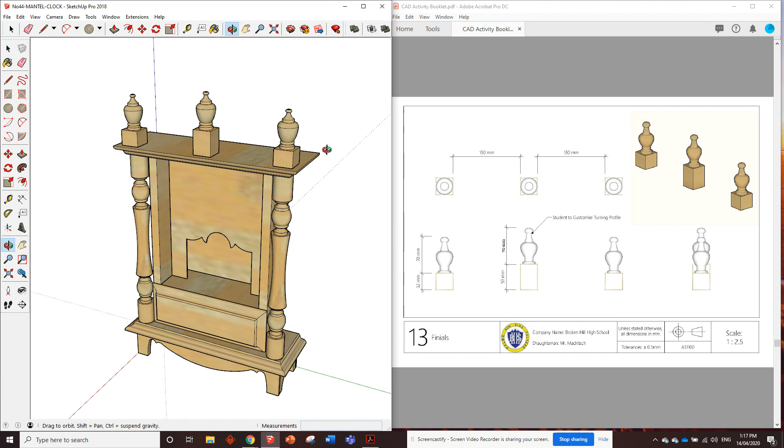We haven't got them in the perfectly correct position yet. We've got them perfectly centered on the top, but we haven't figured out how far forward they are from the back - what this gap here has to be. To do that, if we look at the first drawing, we can see that the crown profile side bits line up perfectly with the back and butt right up against the finial.

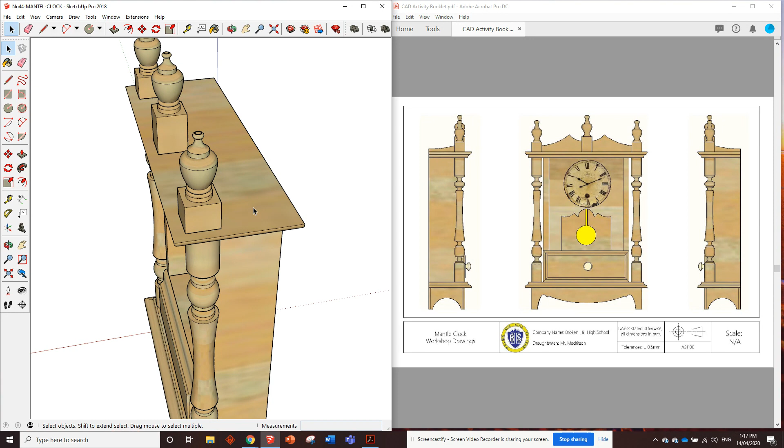So if we figure out what that length is, we know exactly what position it needs to be in. Let's go to the crown profile sides drawing, and we can see that is 85 millimeters long. So that means the gap from the back of the base to the back of the finial needs to be 85 millimeters. Let's go from the back and measure 85 millimeters.

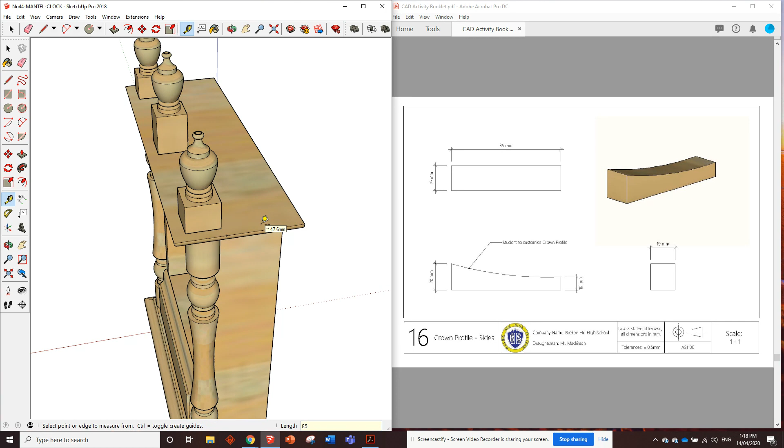What we can do is, since we didn't group them, we hold down Shift, click, click, right click, make a group, so they'll all move together now. We grab the Move tool, click on here. We want to be going on the red axis, so just move it so it's on the red axis. Hold down Shift to lock it on the red axis. Then hover over that guide point you made at 85 millimeters and click. Okay, so now that's in the exact right position.

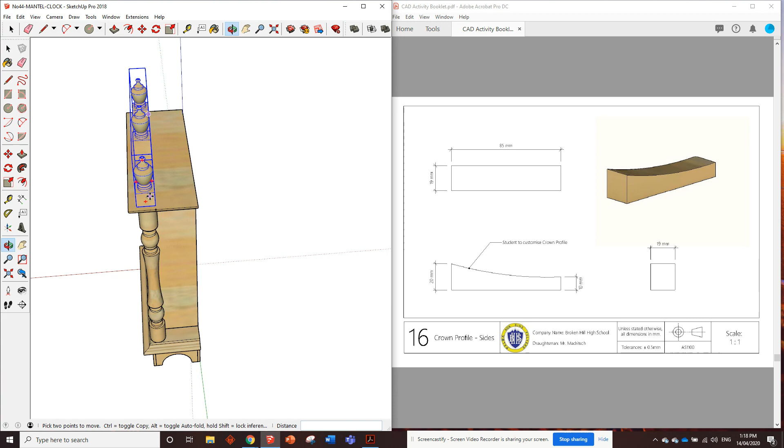So let's see, the crown profile side. That looks pretty easy, we'll do those first. We've got a piece of 19 millimeter thick timber, and it's 20 millimeters at the top. Again, students can customize the crown profile, so you just put your own design on there. If you want a nice gentle slope you can, or if you want something a bit fancier you can do that. But I reckon I'm just going to put a nice easy one in.

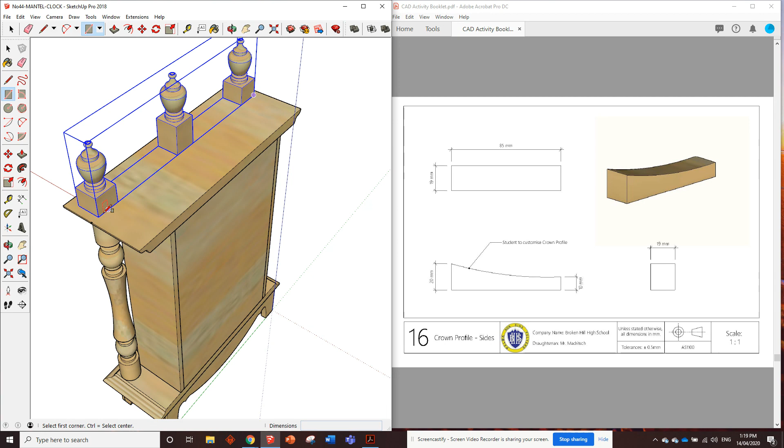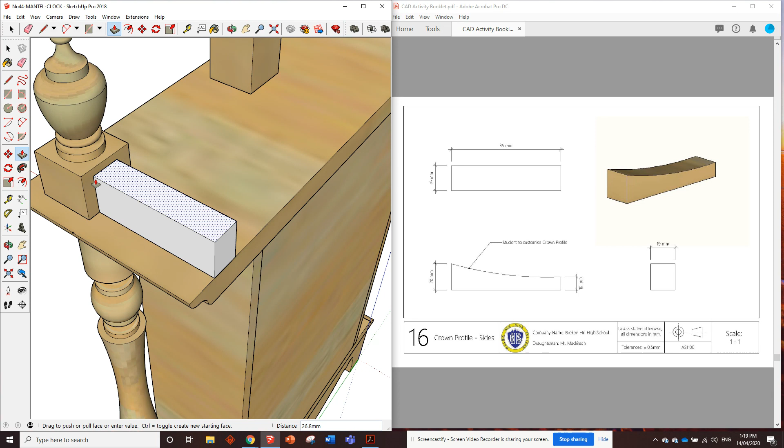So we need to go somewhere here. We won't put it in the exact right position yet, we can move it later. It's got to be 19 millimeters wide, 19 millimeters thick, 85 millimeters long. So we type in 85, 19, enter, and we're going to push that up to 20 millimeters. You could push it up to the top if you want, to have more material to work with for your design, but I'll put 20 in just because that's what it says in the drawing.

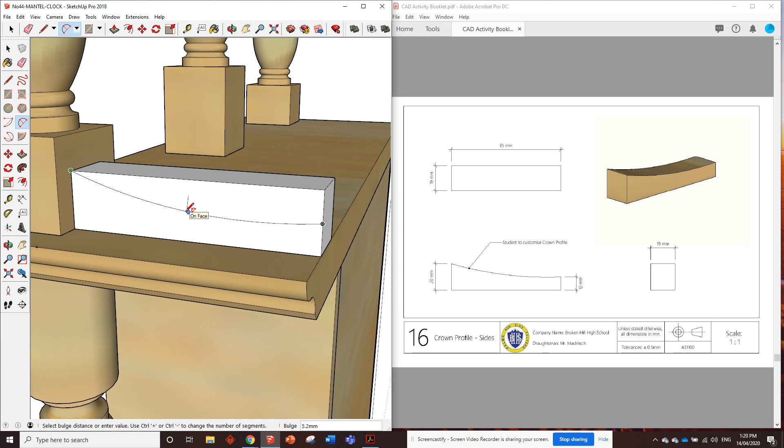Then we measure 10 millimeters up to the back, and we're going to put a 2-point arc in from there to there and just put a bulge in of whatever you think looks nice. You might want a really exaggerated one, or a little gentle one. I reckon a bulge of 5 millimeters will look pretty good. Okay, so we can push that away.

I just realized I haven't made it a component yet. So let's triple click, right click, make component, and call it crown profile side.

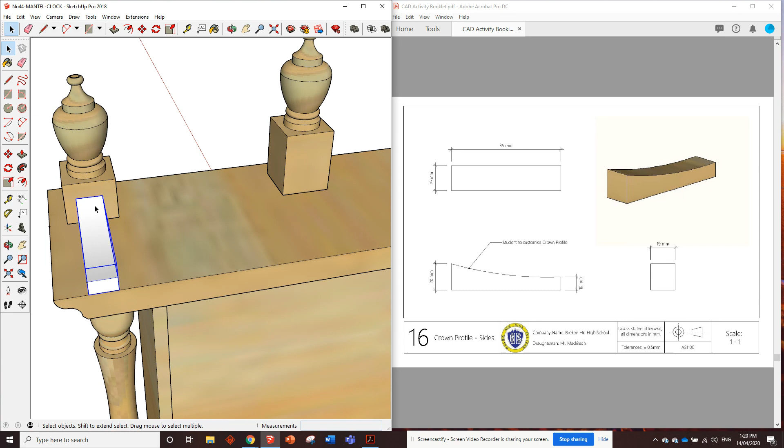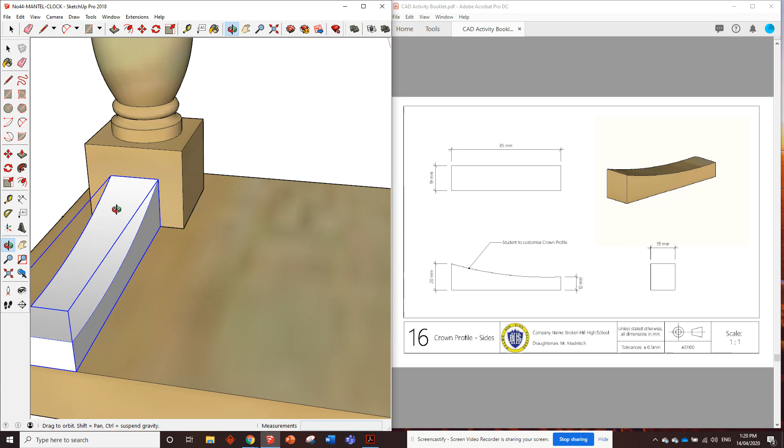Right, fantastic. Now, if this is 19, we want it to be perfectly centered in the middle of the finial. So again, let's move it all the way to the corner. We'll measure the gap left over, which is 19 millimeters, and we need to move it half of that. We know half of 19 is 9.5, so move it 9.5 millimeters across, and that will be perfectly in the center. So what we can do over here is use the tape measure to put in a line 9.5 millimeters away. Did that leave a mark?

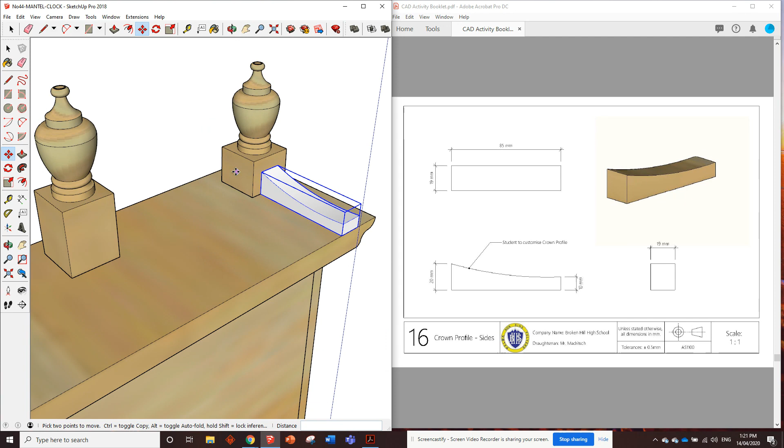We'll grab this crown profile, or a copy of it, use the move tool, press Control, click on that, get another copy and move it to that guide point. So there are the side crown profiles in, easy peasy.

Now we'll paint them quickly since we're done with them. Paint and paint. Cool, get out of that tray.

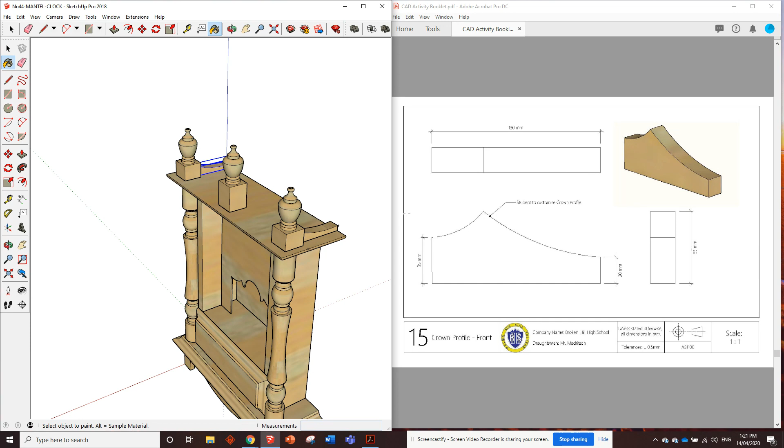Now we just need to put the crown profile fronts on. Again, it says to customize the crown profile, so you can make it whatever design you like. We'll draw them in now in the center because it's not that hard.

We measure from the back corner. There we go, 9.5 millimeters in. We're going to draw a rectangle that is 19 millimeters thick and 130 millimeters, so we'll go 19, 130, enter. That's how big the piece is.

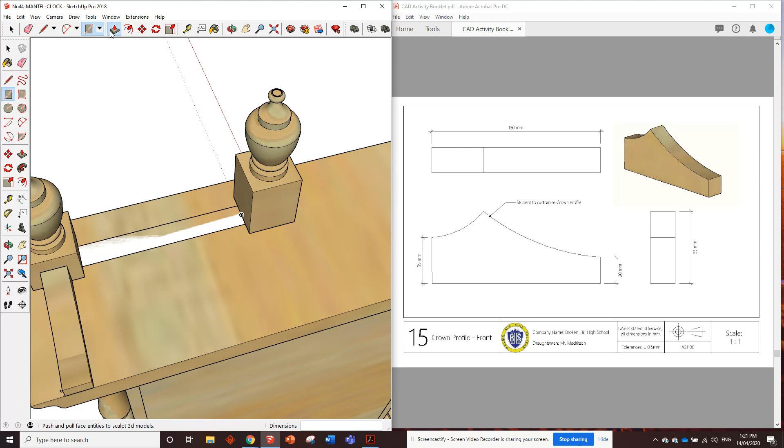This one is pushed up 55 millimeters, which is a bit above that actually. So we'll go 55, right, like that.

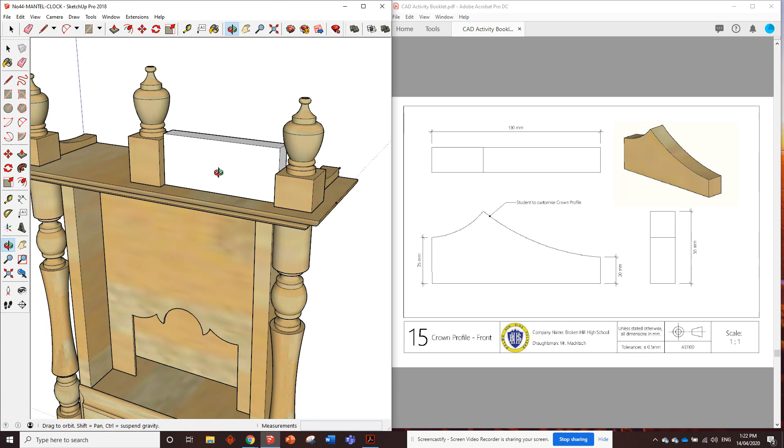Again, these pieces are just going to be made out of offcuts, things you find in the scrap wood bin, any piece of radiata pine or whatever you're making out of that would fit here, and then you draw your own pattern on it. I'll just do this pattern because it's pretty easy, but get creative, see what you can come up with.

Let's go up maybe, that one says 35 millimeters, so we'll go 35 millimeters, and then here we'll go up 20.

Okay, and then we'll go across maybe 35 millimeters for that point. We'll put in a 2-point arc from that guide point to that guide point, slope it in, whatever looks nice, maybe a 5 mil bulge again, here to here.

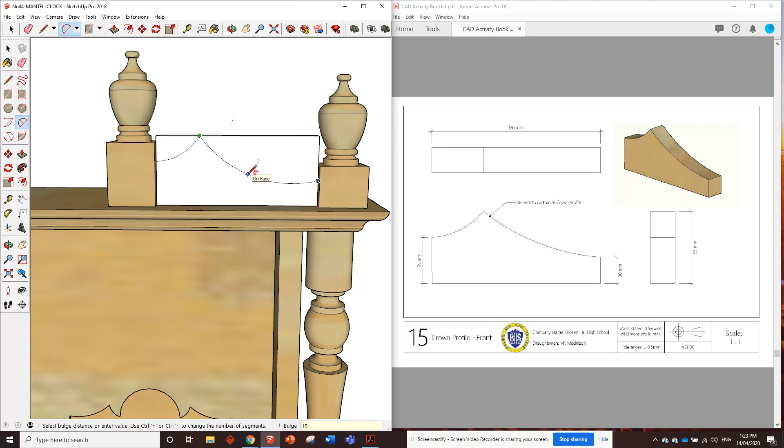And again, I reckon a 5 mil bulge will look pretty good. That looks a bit flat actually, maybe we'll go a bit more. All right, that looks pretty good. What's that? Nearly 15, okay, we'll put in 15. There we go, we can now push these away, and that's the crown profile front as well.

So let's triple click that, right click, make it a component, crown profile front, enter. Now we need to make a copy of it and move it into position.

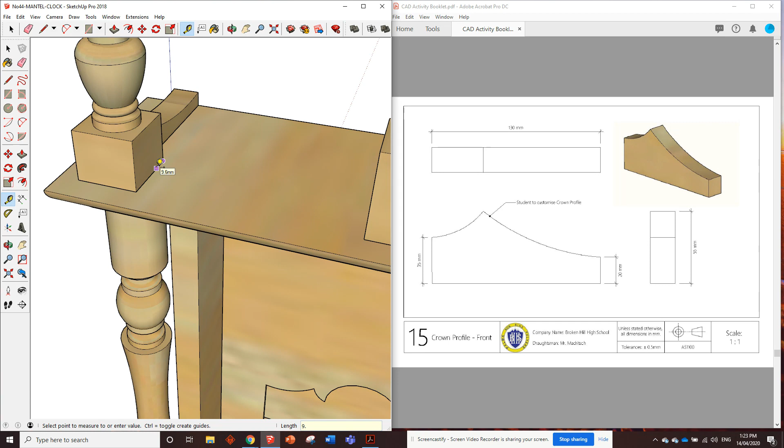Let's mark our position first with the tape measure, which is 9.5 millimeters away from the back edge. Grab the move tool, press Control, make a copy. We need to turn it around 180 degrees.

Oh, we can type in 90. Oh, that didn't work, come on. Come on, there we go, 90 degrees.

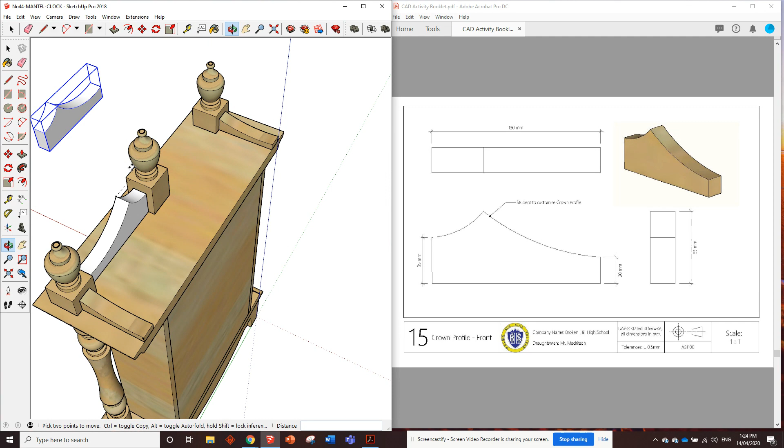We'll grab the back corner here and move it to that guide point. Okay, so there is the crown profiles. Let's paint them fine, like that.

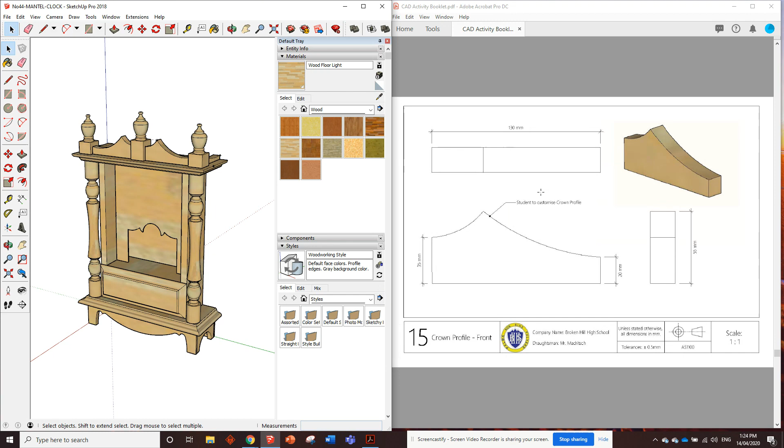Okay, so in the next video, we're just going to go over the hardware and accessories. We need to put a little drawer pull on, we need to put in a pendulum and a clock face, and that is the clock done.